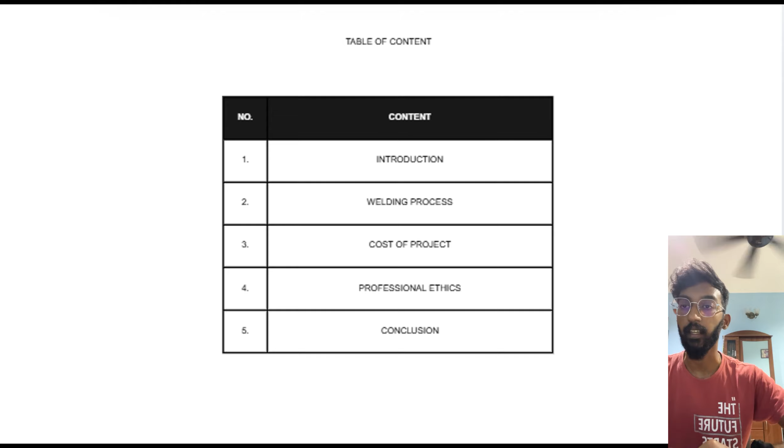Introduction. Shielded metal arc welding, SMAW, commonly known as arc welding, is one of the most widely used welding processes in the manufacturing and fabrication industries. It is described as a joining process that uses a welding power supply to create an electric arc between an electrode and base material to melt the metals at the welding point. It can also be known as a manual arc welding technique that uses a consumable electrode coated with flux to lay the weld. The electric current creates an arc between the electrode and the base material, which melts both the metal and the electrode to form a strong joint.

The flux coating produces a gas and slag that protects the weld pool from atmospheric contamination, ensuring a clean and solid weld. SMAW is favored for its simplicity, portability, and effectiveness on a variety of metals, especially ferrous materials like mild steel. It does not require external shielding gas, which makes it ideal for outdoor work or in environments where wind or air movement would otherwise disrupt the welding process. Due to its versatility and cost effectiveness, SMAW is widely applied in construction, structural fabrication, pipeline work, and general repair tasks.

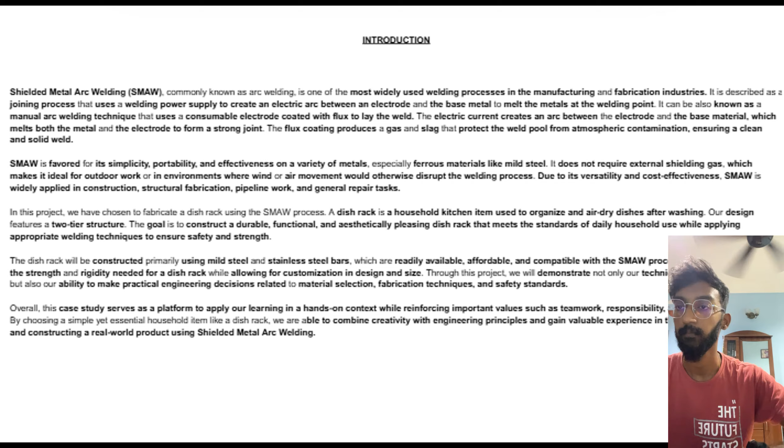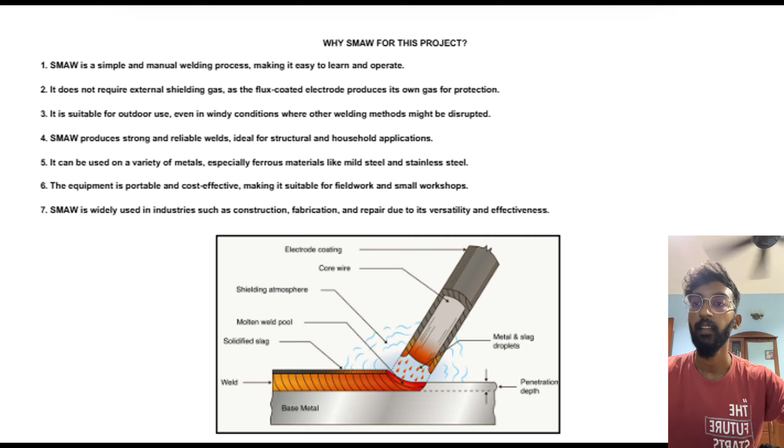Why SMAW for this project? SMAW is a simple and manual welding process, making it easy to learn and operate. It does not require external shielding gas as the flux-coated electrode produces its own gas for protection. It is suitable for outdoor use even in windy conditions where other welding methods might be disrupted. SMAW produces strong and reliable welds ideal for structural and household applications. It can be used on a variety of metals, especially ferrous materials like mild steel and stainless steel. The equipment is portable and cost-effective, making it suitable for fieldwork and small workshops. SMAW is widely used in industries such as construction, fabrication, and repair due to its versatility and effectiveness.

Why is a dish rack suitable to be fabricated using shielded metal arc welding? Number 1, works well with mild steel. Number 2, strong and durable joints. Number 3, cost-effective for small projects. Number 4, no need for shielding gas. Number 5, good for simple structures. Number 6, portable and workshop friendly. Number 7, flexibility in joint angles.

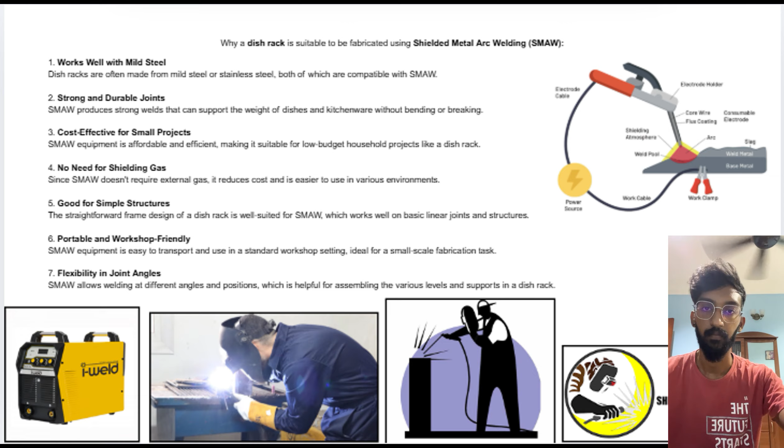Thank you. The equipment needed includes the work cables, which conduct electricity from the power supply to the workpiece, and the electrode cables, which carry electric current from the welding machine to the electrode holder.

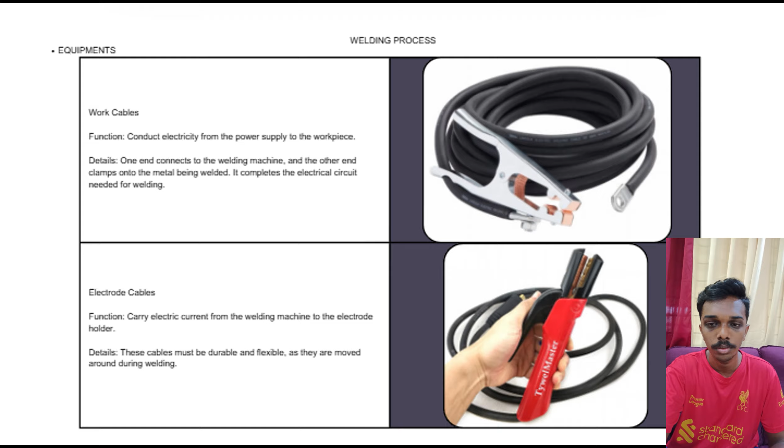Now for the electrode holder, it holds the consumable electrode and delivers current to it, while the wire brush cleans the base metal before and after welding.

The chipping hammer removes slag from the weld bead after welding, while the tongs are used to hold, grip, or move hot metal workpieces during or after welding.

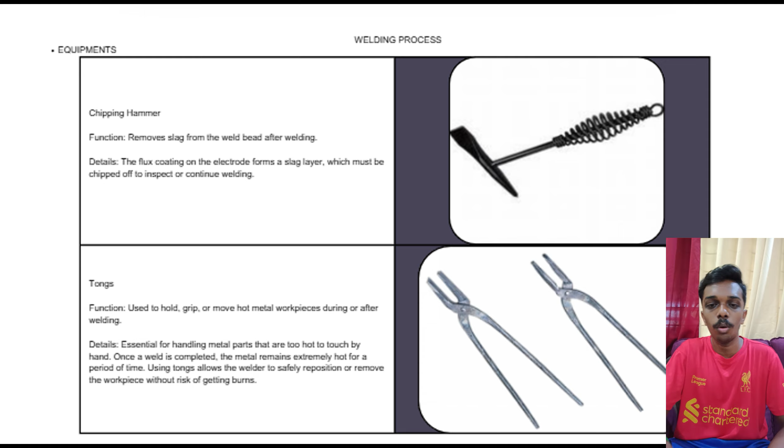Last two are the power supply, which provides the electric current necessary to create the welding arc, and the electrode, which is the most important thing, as it melts to form the weld joint and also provides shielding gas through its flux coating.

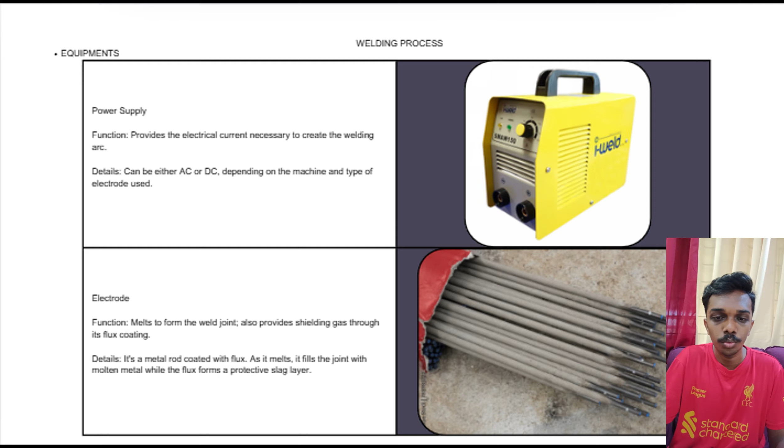Next is personal protective equipment. For the welding process, we use a face shield. Its function is to protect the welder's face and eyes from UV radiation, sparks, and intense light produced by the arc.

Details: a welding face shield typically includes a darkened lens or auto-darkening filter that shields the eyes from the bright arc flash, which can cause serious eye injuries, and also protects the face from heat, slag, and flying sparks.

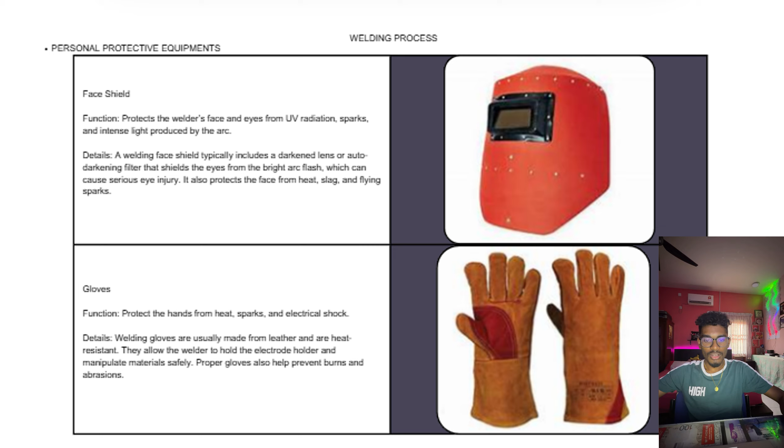Glove function: protect the hands from heat, spark, and electric shock. Details: welding gloves are usually made of leather and are heat resistant. They allow the welder to hold the electrode holder and manipulate material safely, preventing burns and abrasions.

Next is the safety jacket. Its main function is to shield the upper body from heat, UV radiation, sparks, and molten splashes.

Details: it's typically made of fire resistant materials such as leather or flame retardant fabric. It protects the skin and clothing from burns and damage, especially when welding in close or overhead positions.

Safety shoes function is to protect the feet from falling objects, hot metal, and electric shocks. Details: safety shoes or boots are usually made of leather and include steel toes and insulating soles. They provide a strong barrier against sharp, heavy, and hot materials that may fall during welding.

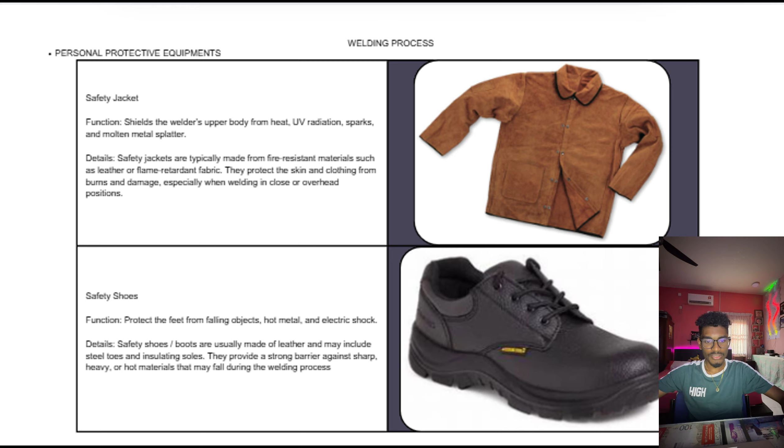Next is safety procedure before welding. Check the working area to ensure safety. Ensure fire safety by keeping a fire extinguisher nearby and make sure the working area is free of flammable materials.

Prepare necessary equipment such as the work cable, electrode cable connected with the electrode holder, wire brush, chipping hammer, and tong.

Prepare the electrode by clipping it into the holder. Make sure the cables are not entangled. Use a suitable power supply and set the power. After that, clean and set up the metal workpiece.

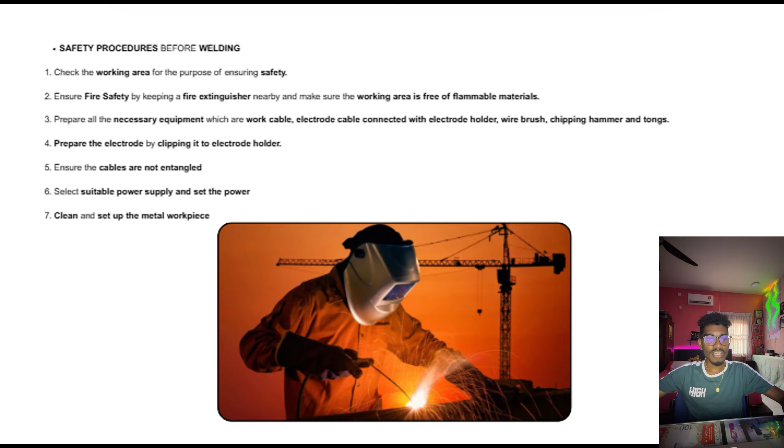During welding, strike the arc on the workpiece and start the welding process. Maintain a safe distance from the welding arc and keep your face and body properly shielded to prevent burns from sparks and rays.

Hold the electrode holder using an insulated glove to avoid risk of electric shock. Stay fully focused and avoid distraction to ensure precise and safe welding work. Use a welding curtain or screen to protect others nearby from harmful arc flash.

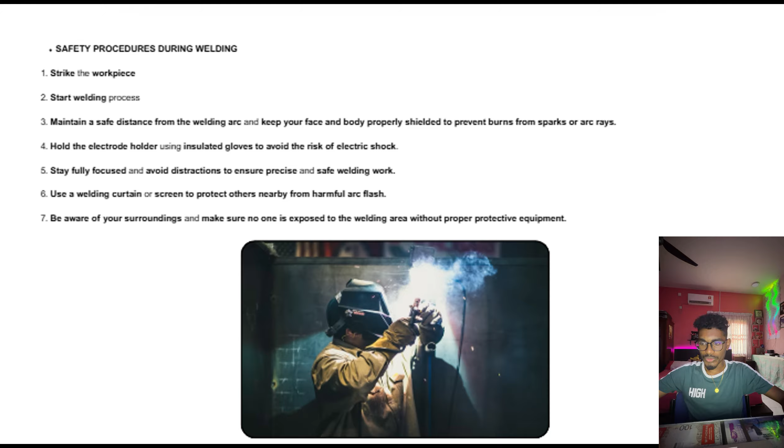Be aware of your surroundings and make sure no one is exposed to the welding area without proper equipment. Lastly, the safety procedure after welding is to turn off the power supply after use and place the cables and equipment neatly.

Allow the welded metal to cool down before touching it, as it remains extremely hot and can cause burns. Turn off the welding machine and disconnect the power supply safely. Store leftover used electrodes in their proper container to prevent fire hazard.

Inspect the work area for any sparks, smoldering metal, or potential fire risk. Clean up slag, debris, and other waste materials from the welding area safely. Return all tools and safety equipment to their designated storage place to maintain an organized workspace.

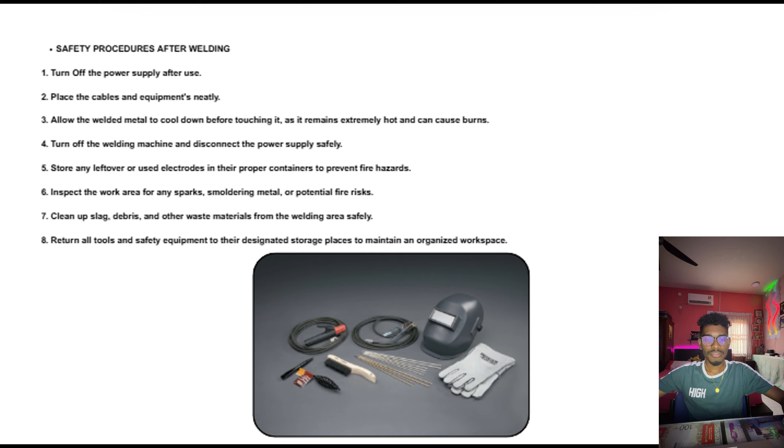Now we'll continue with the materials used. For this project we have stainless steel and mild steel bar. The welding technique used is spot welding, conducted to build the whole frame.

Each joint is carefully spot welded to hold the components in place, followed by a full weld to secure the structure. This technique allows for a strong, durable bond, ideal for supporting the weight of kitchenware.

Small welds are applied at key points to stabilize the structure during assembly. This prevents movement or distortion before completing the final weld with SMAW.

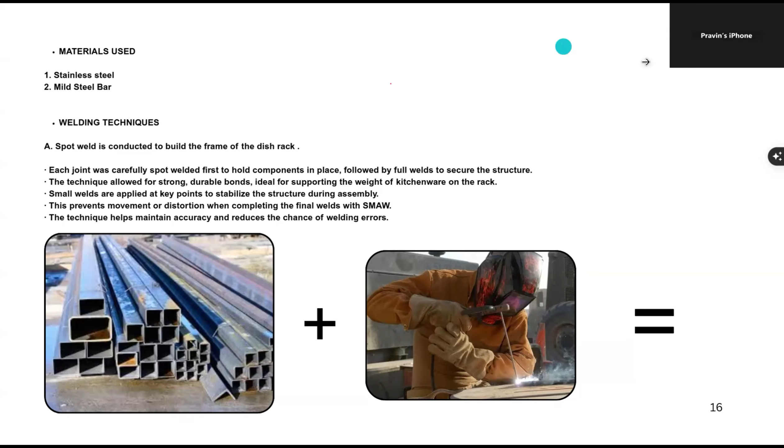The technique helps maintain accuracy and reduces the chance of welding errors. This is the welding outcome of it.

Challenges faced during welding: ensuring all steel parts are properly aligned before welding is critical, especially when dealing with multiple rods for the rack section. This problem of striking and maintaining a stable arc is due to insufficient experience in welding.

The electrode sticking to the workpiece was a common issue, affecting weld quality. Removing slag after each weld was time consuming but necessary to inspect weld quality.

Misalignment can lead to uneven structure and require adjustment or re-tack welding. Some welds were in awkward positions which made it harder to see and maintain a clean weld bead.

Working in vertical and overhead positions increased the difficulty for smooth welding. The project took longer than it should due to rework on poorly welded joints and delays from equipment issues.

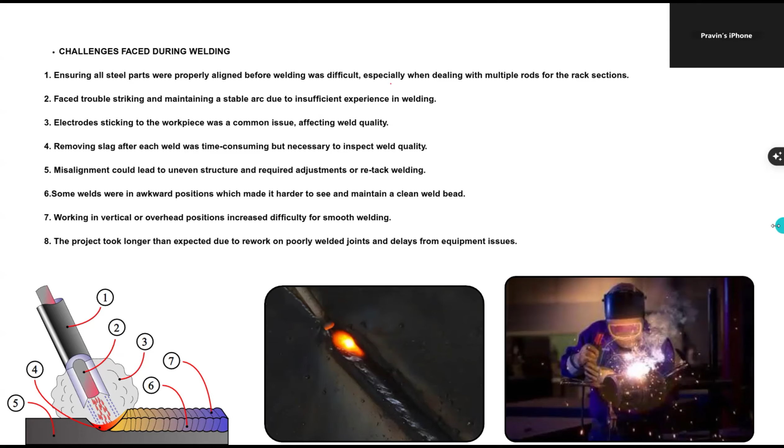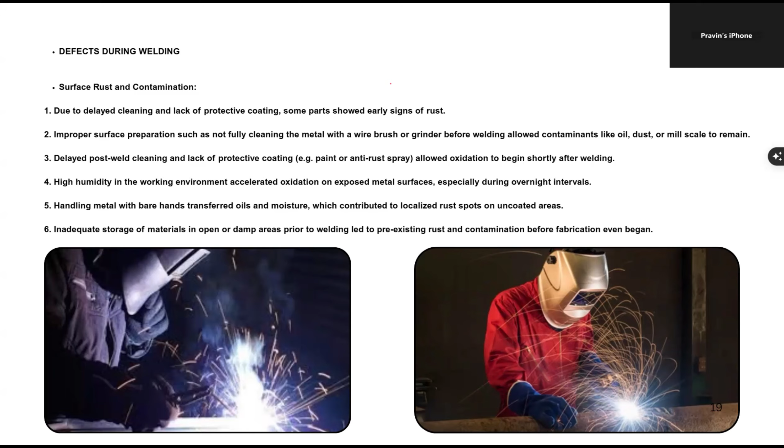Handling metals with bare hands transferred oils, which contributed to localized rust spots on uncoated areas. Inadequate storage of materials, leaving them open prior to welding, led to pre-existing rust and contamination before fabrication even began.

As you can see, this is one example: small metal bits scattered around, with high level safety concerns and visibility issues.

Incorrect welding current, which is indicated in high range because of the thinning of the plate, so a method of holding the correct current is needed.

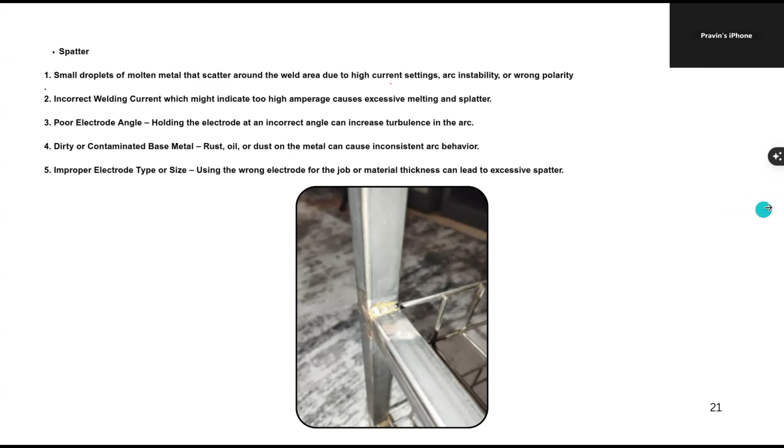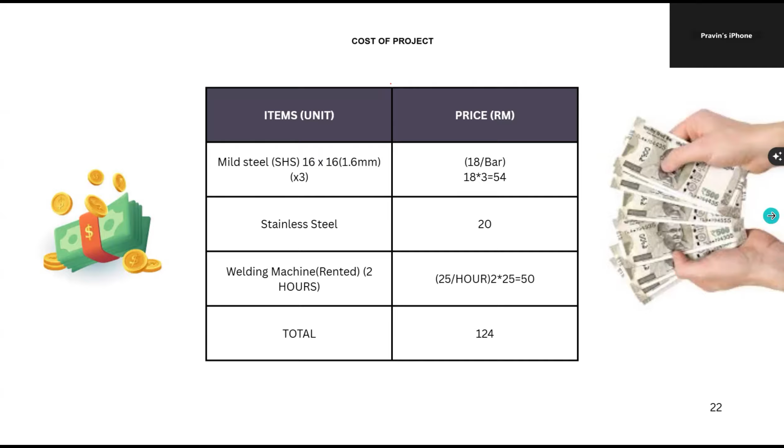Each team member takes responsibility for their assigned task and cost, responsible for the quality of welding.

Team communication and cooperation were key to our success. We listened to each other's ideas, respected opinions, and supported one another. By applying professional techniques, we...

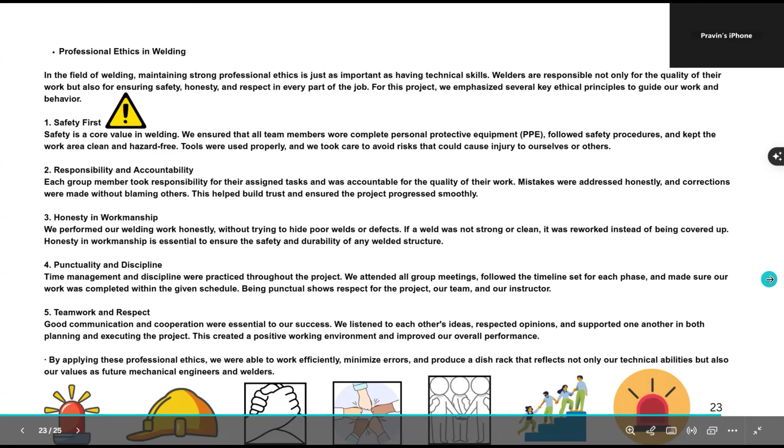...were able to work efficiently, minimize errors, and produce a dish rack. This case study project experience shows the value of hands-on experience in applying skills and methods.

Through this project, we also developed a better understanding of material selection, welding defects, and finishing techniques by determining the importance of cleanliness. The project not only strengthened our technical knowledge but also helped us build soft skills such as...

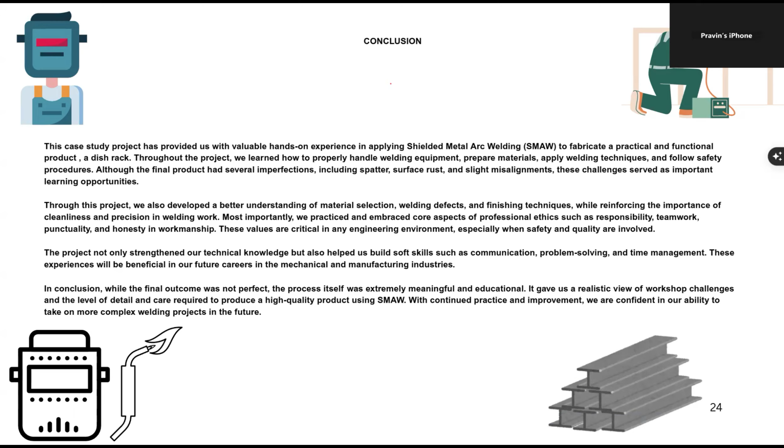...communication, problem solving, and time management. In conclusion, while the final outcome was not perfect, the process itself was extremely meaningful and educational for effective use of workshop challenges. Thank you.